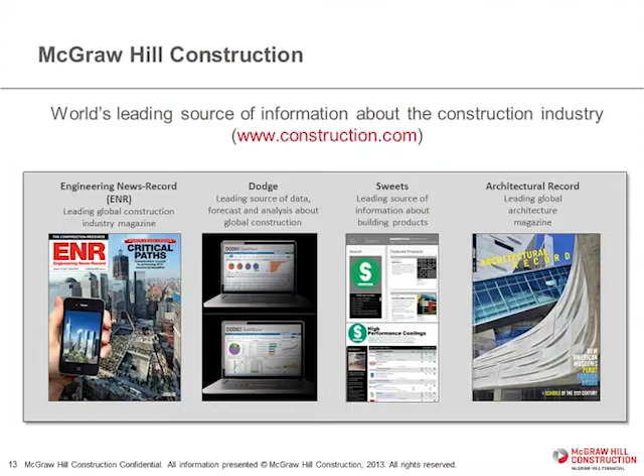At McGraw Hill, the construction business unit is part of 6 business units of McGraw Hill Financial overall. Hopefully you are familiar with a lot of our brands, Engineering News Record, Dodge, Sweets, and Architectural Record. Part of what I am closely involved with is the research. If you go to this website, analyticstore.construction.com, you'll see there's probably about 60 of these now, smart market reports that we've been doing for almost 10 years on various topics. I've been involved in a lot of these that you see here around technology types of topics.

So what we're going to do today is I'll give you some highlights of 4 of the most recent reports, all around technology in one way or another. Then I'll share with you a couple of what we're seeing as the most interesting emerging trends to keep an eye on, and some of the research we currently have underway. Again, these reports are free, sponsored by industry companies and organizations, and they're all at analyticstore.construction.com. Help yourself to them.

So firstly, let me show you the most recent one. It's only been out a matter of weeks now, and it's looking at how construction companies specifically are using BIM in 10 major global markets. We're looking at their level of engagement with BIM, how much of their portfolio they're doing, what their skill level is, what their experience track record is. We're looking at their business benefits, because that's really our angle in studying BIM around the world -- what's the business benefit and what's the return on investment, and where people are going to be making investments.

We also look into the frequency and the value of various business BIM activities, either pre-construction, construction, or post-construction. We have some country profiles for each of the 10 countries, and then there's a series of case studies, interviews, and feature articles on important trends, as there are in all these smart market reports. So I can't really present them in depth, but I'll give you sort of a drive-by view, and you can download it on your own and look more deeply at the information.

Overall, we've been tracking the business benefits and the ROI of BIM since 2007, and contractors have now actually exceeded architects in adoption in North America, and have always exceeded design professionals in terms of their ROI. At this point, we're finding that 3/4 of the contractors globally are reporting they're getting a positive ROI, and in some cases they're at 97% of users reporting a positive ROI. This compares to that last study we did in North America, where only 37% of engineers and only 2/3 of architects could say they were getting a positive ROI.

So the trend is really shifting towards contractors now in a leadership position in BIM, pretty much all over the world. The overall implementation of contractors is going to increase by 50% in the next 2 years. And you're seeing incredible planned growth over the next couple of years in places like Brazil, where they're going to triple the amount of people who are implementing at a high level. And Australia, New Zealand, Korea, and the UK, with their government mandate now, is going to double the number of contractors working at a very high level of implementation.

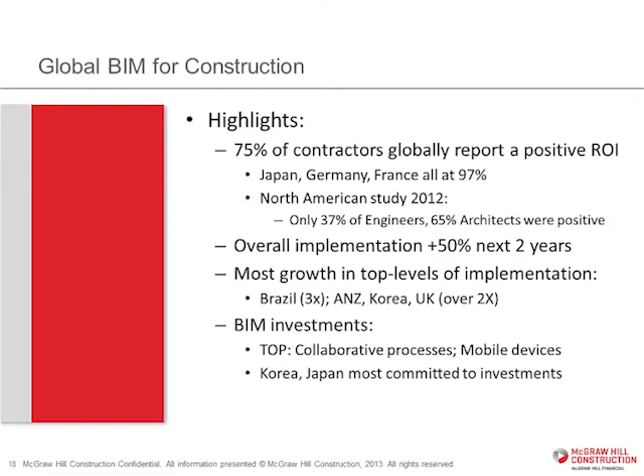And then you'll see some of the investments that people are making, and those who are most committed. Actually, the Koreans and the Japanese seem to be most committed in terms of making investments. So just some of the highlights of the information you'll see when you go through the report. You'll see what sorts of projects people are using BIM on, both building types and non-building types.

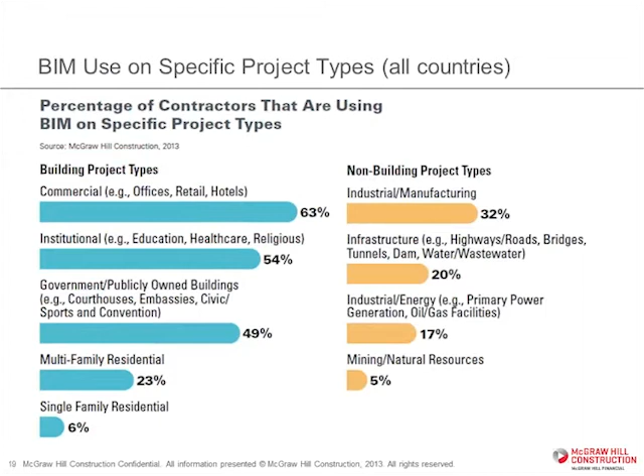And you'll see that broken out by country and with a little bit more specificity in terms of the types. You'll see how long contractors have been using BIM in various regions and their level of expertise.

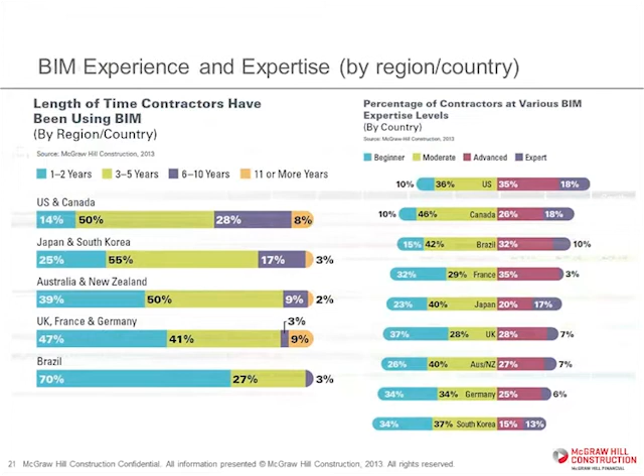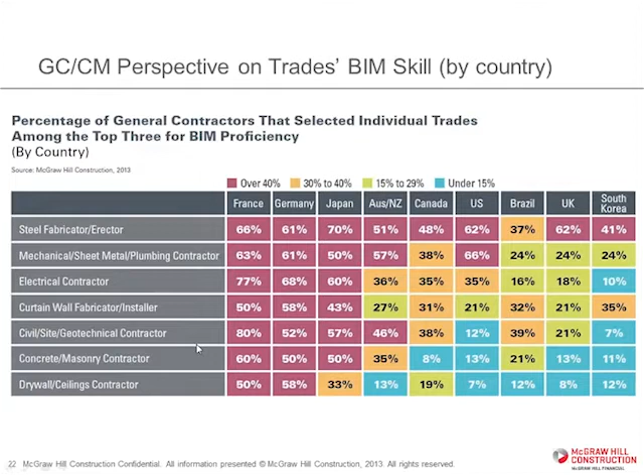And we take this expertise and this experience, and we also ask GCs to tell us what they think about the state of trade contractors by skill in their various countries. You'll see the steel guys and the MEP guys are pretty much the leaders, with drywall, concrete, masonry, and civil sort of catching up down here in the lower right.

We also look at implementation, which is, all right, you're using BIM, you've adopted it, but what percentage of your portfolio involves BIM now? So we have 4 categories. That low is really, they're kind of in the shallow end of the pool, only 15% of the projects, all the way up to a very high level where more than 60% of your projects involve BIM.

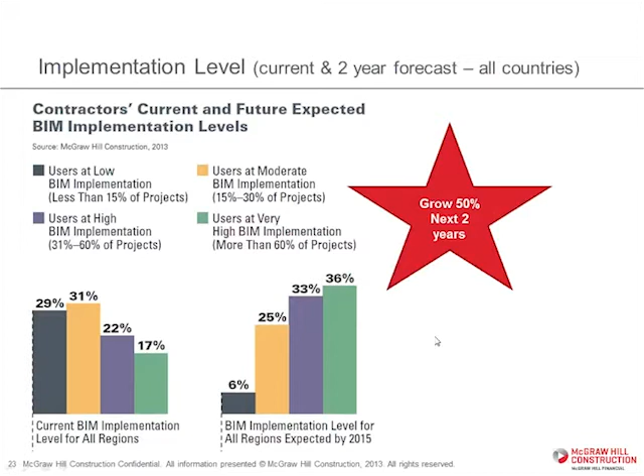And so these 2 graphs you see here, on the left is currently, and on the right is a projection for 2 years from now. And this is where we see this 50% growth in the amount of BIM that contractors say they'll be doing 2 years from now. So this is growing incredibly rapidly all over the world. You'll see a breakdown by country, and you see places like Brazil here is going to triple the number of people operating at that high or very high implementation level.

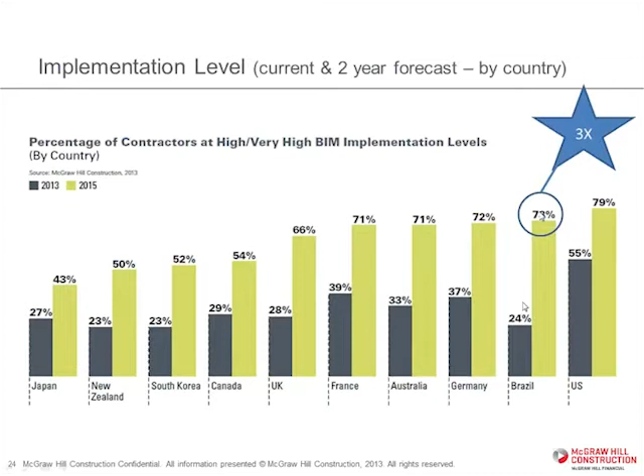And so we take those 3 things, the experience, the skill, and the implementation, and we developed a weighted scoring apparatus for that, which we call the BIM engagement level. We assign an index to every single one of the respondents, and then we break that down across all the regions. Overall, there's 11% that we would consider to be at this very high engagement level. They've got a high skill level, high experience level, and they're implementing at that highest level of implementation. So we expect that's going to grow interestingly over time as we continue to track this. So right now, we just have 11% of the BIM user contractors around the world that we would consider to be in that top group.

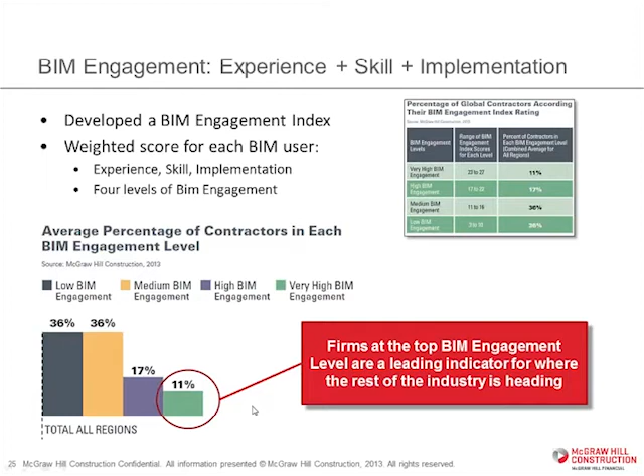And you'll see how that breaks out by country. The U.S. probably has the highest number at that very high level, but Canada also, Australia, New Zealand, South Korea, the U.K. all have folks operating at that very high level. And you'll see a place like Brazil still has over half their users at that low engagement level, but as we all saw earlier, they're planning to triple their high engagement folks very soon. So that's a really fast-growing BIM market down there. And the U.K. as well, because of the government mandate there.

And we break it out by the size of companies. So you can see with folks at the very high BIM engagement level, it's mostly the bigger companies, versus at the low engagement level, it's mostly these smaller companies.

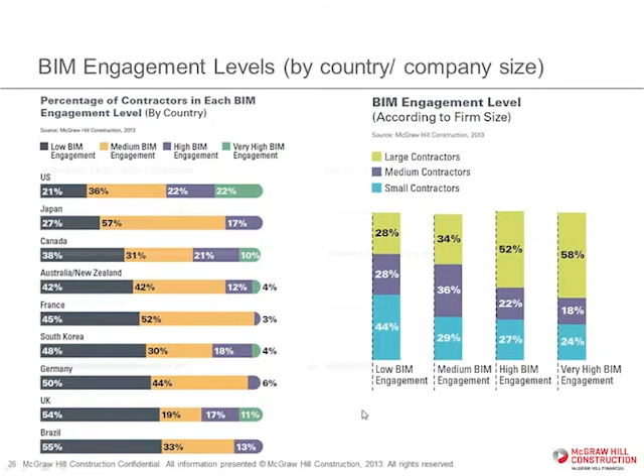So as I said before, we've spent a lot of time tracking benefits, and we've been doing this now for 7 years. You can see here across all those countries what people are citing, from the contractor's viewpoint, as being the top benefits of BIM for their company. I've put a little star by the ones we consider to be internal benefits—things that actually impact you as a business, versus making the project or the project process better. You can see where they fall, because those, at the end of the day, are the ones that really drive any kind of technology adoption. It has to actually be really good for the business that's using it.

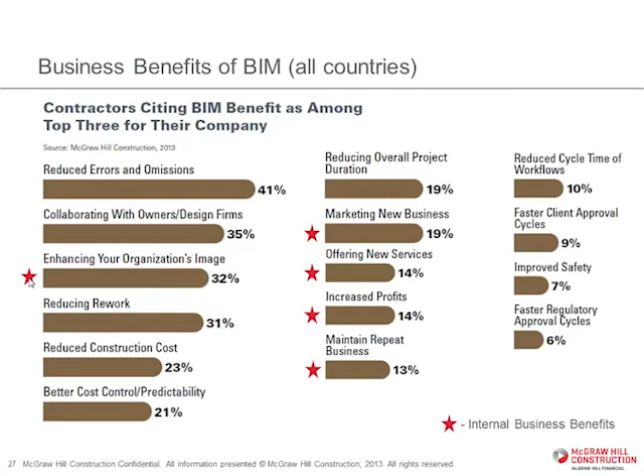In terms of ROI, we've also been tracking that since 2007. Across all those countries, it's kind of a bell curve, with what we call moderately positive ROI being the majority. But when you slice it by BIM engagement, you see half of those very high BIM engagement folks have what we call a very positive ROI, over 25%, versus those at low BIM engagement, where you still have a third that are either negative or break even. This is a natural flow, but it's interesting that as people improve and commit to further investment, further skill level, and further implementation, the ROI definitely improves.

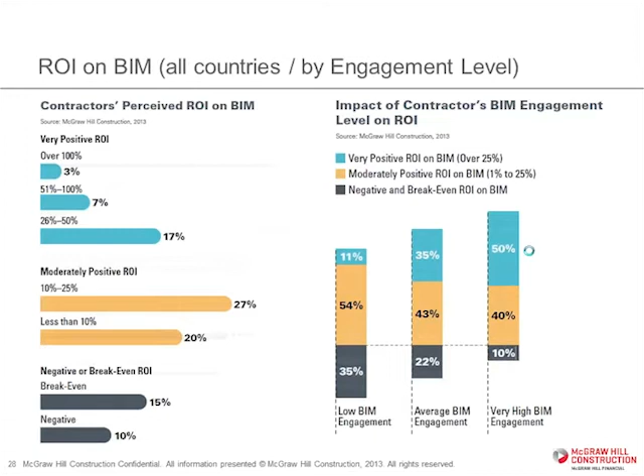We'll show it to you also by country. We do a 2-page spread on every single country, so you can look at those countries individually in the report.

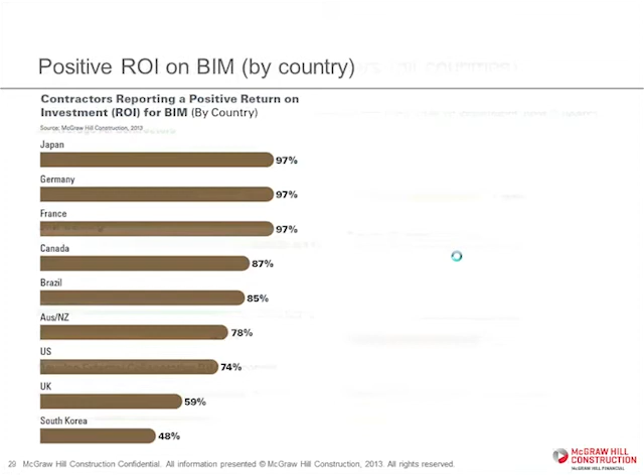That leads us to our quick look at the second report, which we did on information mobility. Again, this one's free at the analytics store. The purpose was to baseline where we are in terms of information mobility and assess any gaps that need to be addressed by the industry to make this more powerful.

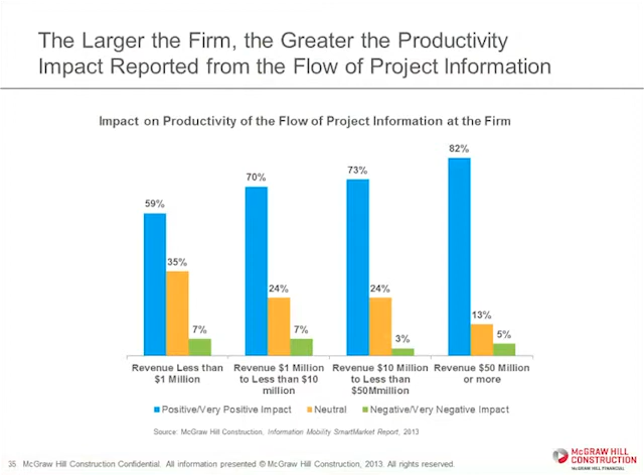We focused again here just on trade contractors and general contractors. In terms of benefits, you can see collaboration, better productivity, less reliance on prints and paper, and reduced risk. There's a study part about the impact on productivity of the flow of project information—the larger the firm, the greater the productivity impact that they found.

There's a fair amount talking about this progression we're making from basically 20th century types of technology—communications technology, authoring of information, and sharing of information—into where we're now going in the 21st century, and where the generals are and where the trades are.

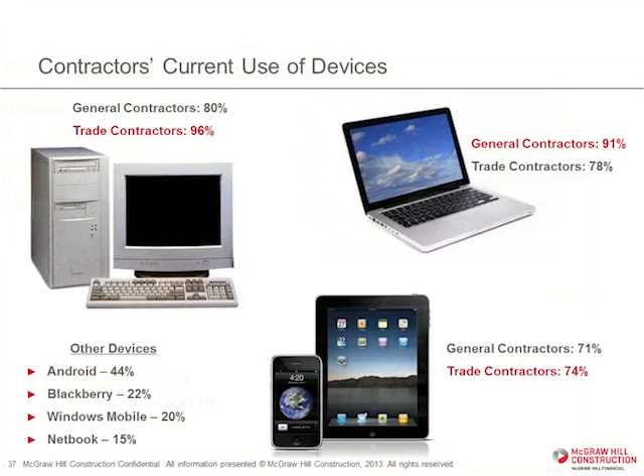In terms of BIM, this kind of information we've been tracking here in the United States since 2007, in terms of BIM adoption, hasn't really caught up quite so much when you look at what people are now doing on mobile. So that has to move out of the office and off the desktop and out into the mobile area. That's one of the gaps we identified that really still needs work.

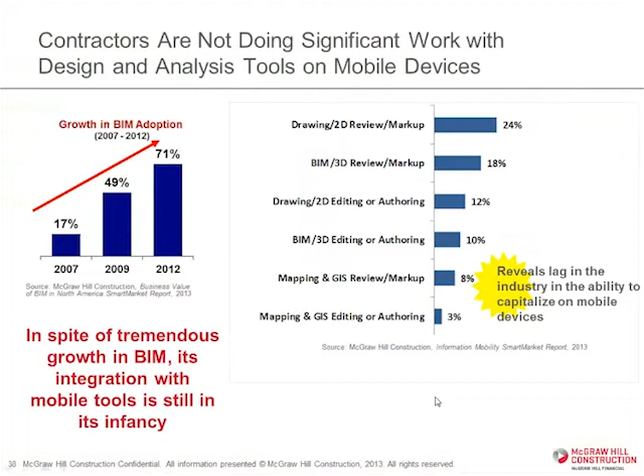Also in terms of documentation, mobile technology is going to lead us into probably new types of access and new types of documents. But mostly people are still working with sort of old-school documents in this new-school kind of communications tool. So that's another area that's going to grow—now that you have these mobile devices, what sort of document formats can you be bringing to people?

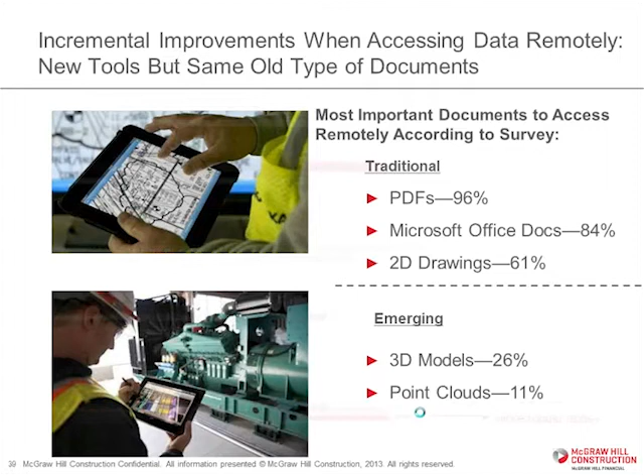We track that in terms of not only the types of documents, but cloud storage services. The gray line is now, and this red line is where people think they'll be doing it in 2 years. Everybody sees that they'll be doing far less in the way of these traditional documents being the main point-to-point exchange, and a whole lot more putting information up into the cloud and having people get it from there. So this is very clearly a trend that we're going to see in construction.

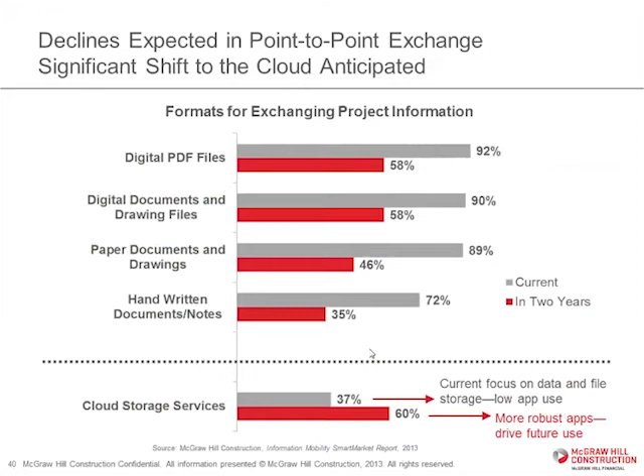In terms of lean design and construction, the third report I'll share a little bit with you today. This is free and you can download it from the site.

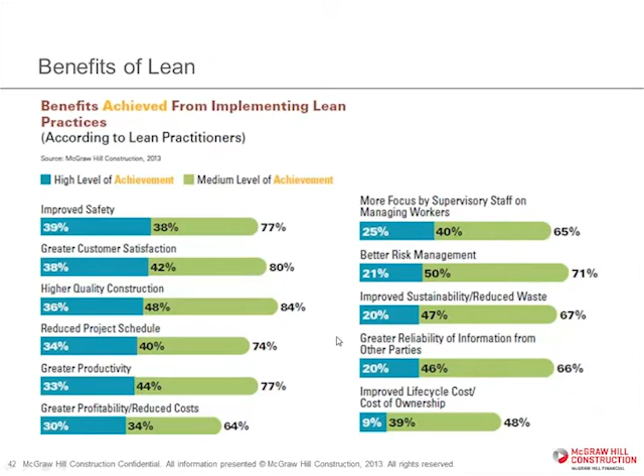We looked at the benefits achieved by those implementing lean, and it's really astounding. You'll see people at a high level of achievement and a medium level of achievement, and this is the percentage of those players actually getting these kinds of benefits. We go into detail about project profitability, impact on profit margins, and these green areas.

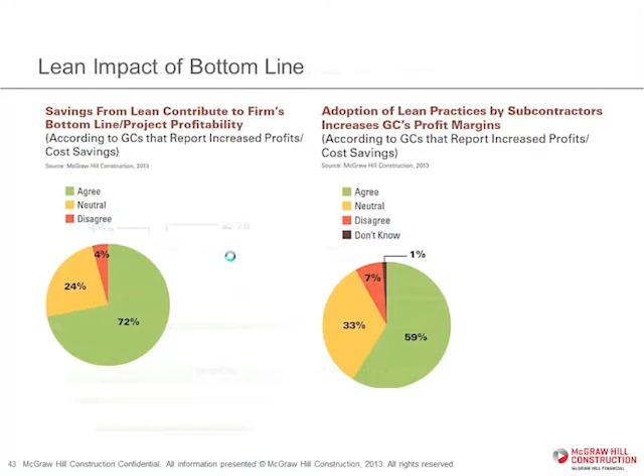Are where people agree they're actually getting a lift in those areas from moving into lean practices, specifically the impact on profit because of schedule improvements, impact on being more successful in bidding, and impact on competitiveness. These benefits are really compelling.

But unfortunately, when you look at the entire industry and ask them, are you familiar with it? Are you not familiar with it? Have you implemented it? It really isn't being taken up very aggressively. A little bit better in the West than other parts of the country, but still it's very much emerging, even though the benefits are very tangible and powerful.

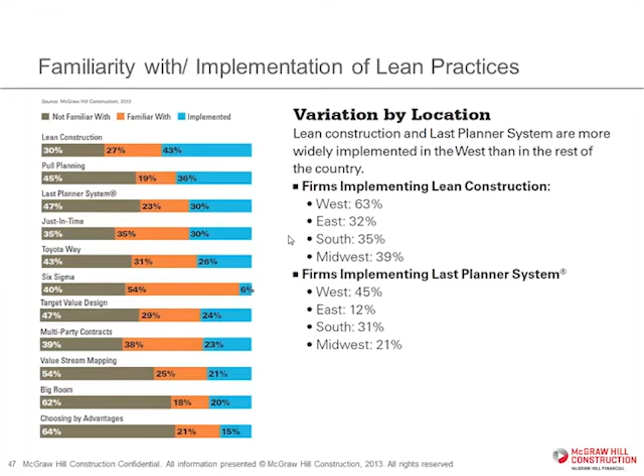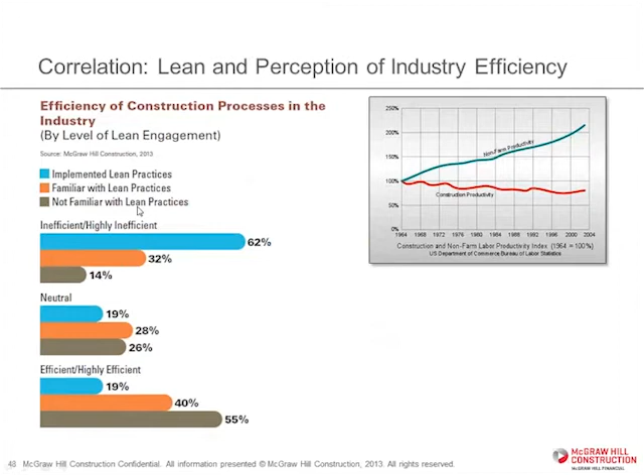You can see almost all of those are the folks who aren't even familiar, never even heard of lean. So I look at that as you've got almost half the industry out there in super denial about the facts of our industry.

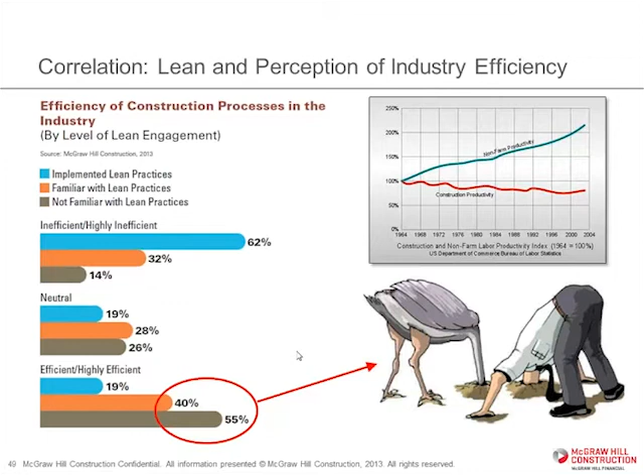So we're really trying to push much better awareness about lean practices and the benefits of them. As you wouldn't be surprised to see, we put a fair amount of time in this report into looking at why lean hasn't taken over as much as it should have, and it's really about a lack of knowledge, support across the team, it's too complex, employee resistance, lack of understanding.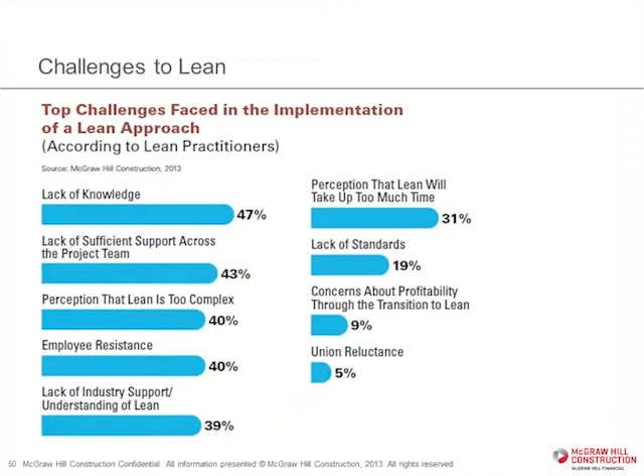So really an awful lot of this is educational, and that's part of why we do these reports, and we make them free, to try and get the information out.

Lastly, I'll show you a report we did about the growth of green design and green building trends all over the world. We did this in 62 markets, with almost 1,000 respondents across all the various types of players. We did specifically deep dives in Germany, Norway, the UK, Singapore, Australia, the UAE, South Africa, United States, and Brazil, but we do have data from all these other markets in this report.

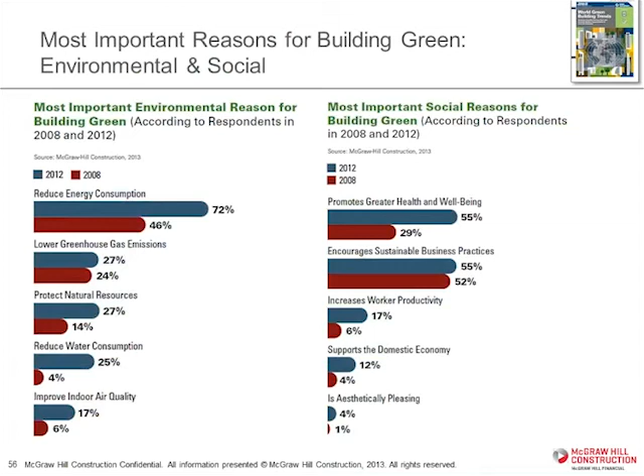We also track the most important reasons, the social reasons, the environmental reasons, and we look at what sectors are planning the green building activity over the next 3 years.

You'll see a deep dive into the various benefits that people are getting, and the difference between applying it to new construction versus renovation. Actually, the median payback on renovation projects is a little bit better than on new green building.

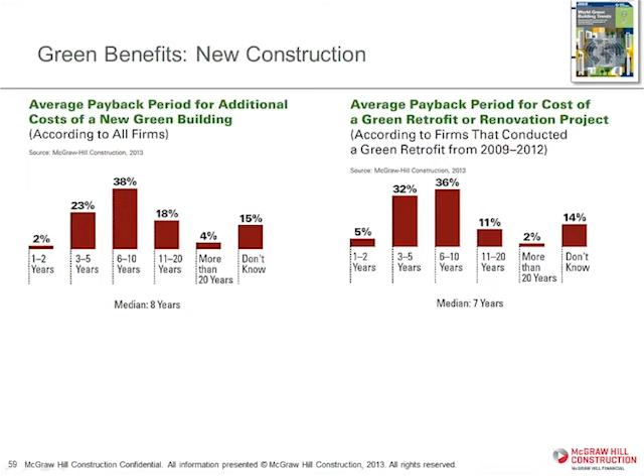And then the same thing in terms of business value. From an owner's viewpoint, is building green or renovating green going to increase my asset value? This is something we've been tracking for 3 or 4 years, because we see this as probably the biggest driver: owners realizing their asset value will increase. That's going to drive them to implement much more green practices on their new and renovation projects.

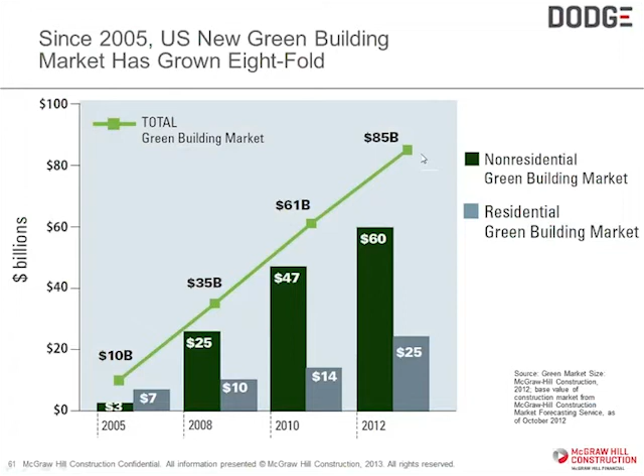Since 2005, we've been tracking projects in Dodge. When they come into our Dodge database, we have about 600,000 projects in North America at any one time that are currently in the design phase. One of the questions we ask is, are you going for LEED certification? And that, as you can see, has just really skyrocketed over the time we've been tracking it.

So if you look at where we believe the non-residential starts are going to be - this is a quick peek at our economic forecast, where we believe we're going to see extremely good growth over the next couple of years - what percentage of that is green is really exciting. And this is all non-residential.

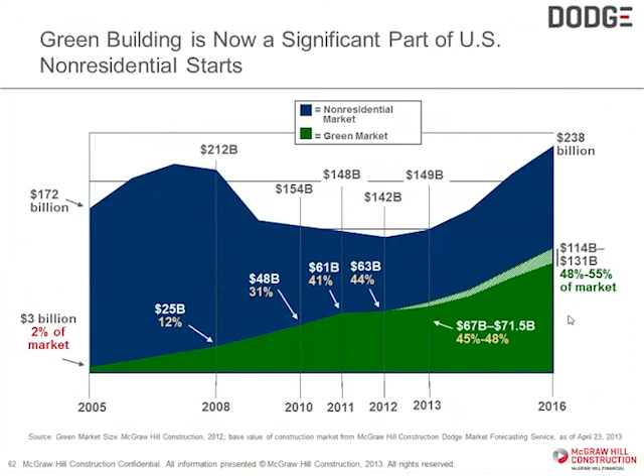We also show in the report the impact on revenues through this global financial crisis we've just been through. Those green projects versus the rest of the industry have actually carried people across the global financial crisis.

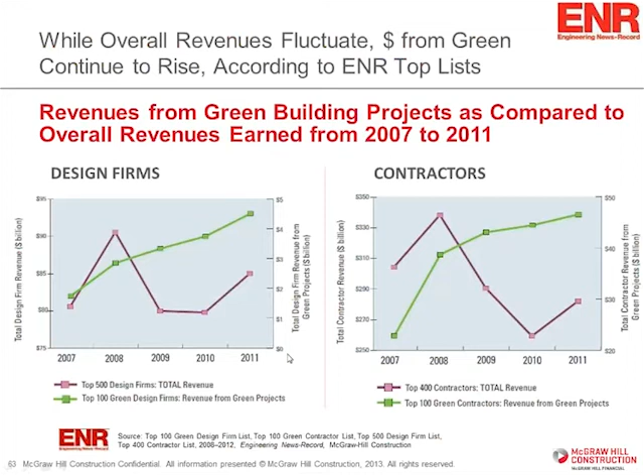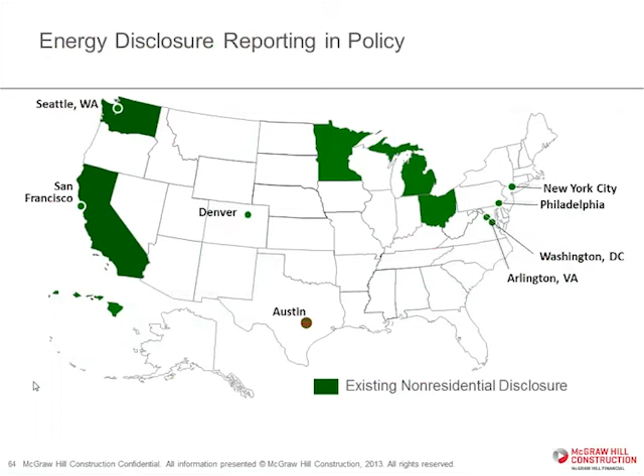Looking at what those drivers are, not only do owners have to understand it, but you can also do an awful lot with policy. The growth of energy disclosure reporting policy, where it's under consideration, and there's existing nonresidential policy as well - this trend will also really help drive green.

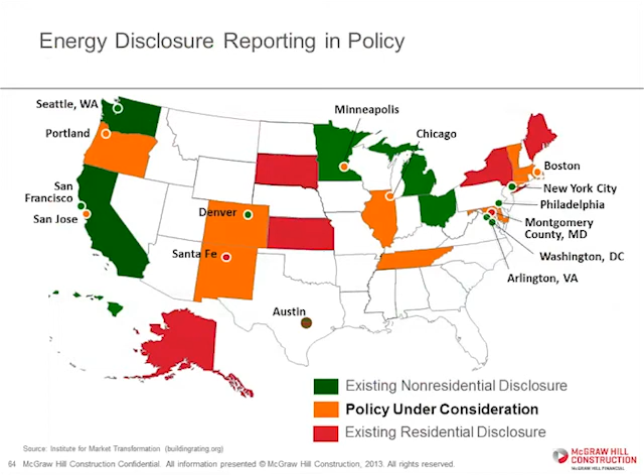So that was a look at those 4 reports. I encourage you to go to analyticsstore.construction.com, download any of those, and see the other 30 or 40 that are up there on various topics.

Let me share with you now some of our thoughts in terms of things we're seeing that we believe are going to be interesting trends affecting everybody. I'm just going to touch on a couple today. The first one's about visualization.

With BIM, we've been able to do incredible amounts of very powerful visualization, but it has largely been on a computer screen in an office somewhere. Not to downplay that - with 20 years in architecture, I know how important it is to engage a client or a contractor really viscerally and deeply visually in your design intent. But now the point is, how are we going to get that out to the field especially?

How are we going to take that model data and begin to integrate it into some other formats? How can we make it portable? How can we take the power of modeling and make it easy to bring with you? And how are we going to integrate it with some of the other technologies that are out there?

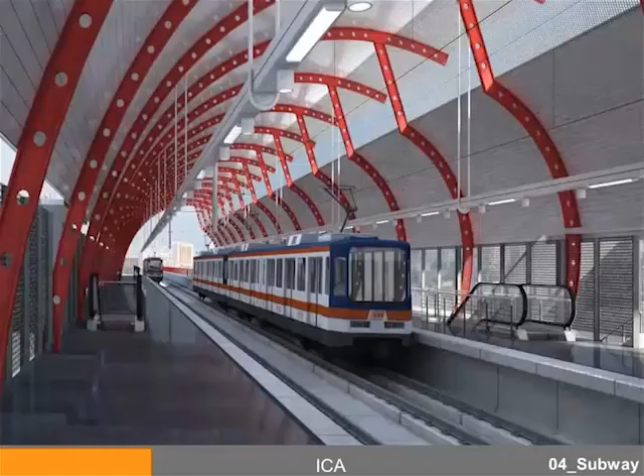Pretty powerful stuff. I don't know how many of you have seen natural light holography, but holography used to be pretty complicated in order to actually visualize it. But now you can take a model and print it onto a flat piece of plastic.

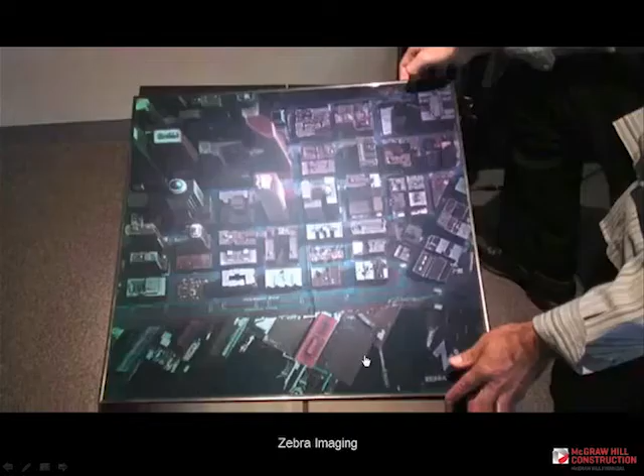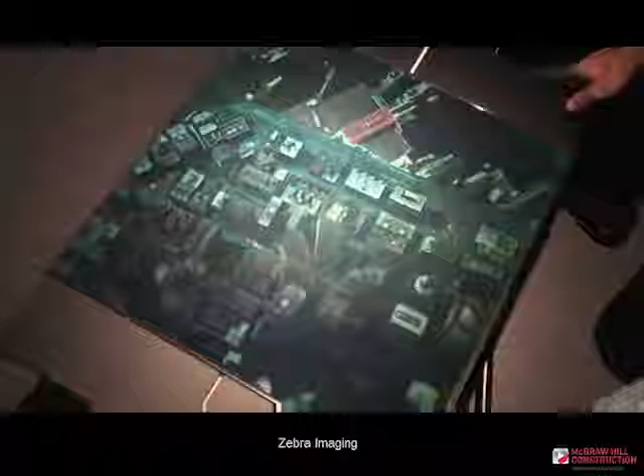And you could carry that on an airplane and go to a meeting, and you plop it down on a table, and nobody needs goggles or glasses or anything special. You hit it with a halogen light from above, and the model pops right up off that piece of plastic in pretty high detail, and you can see it right there in the room. But as you can see, this guy's turning it - it's just a flat piece of plastic.

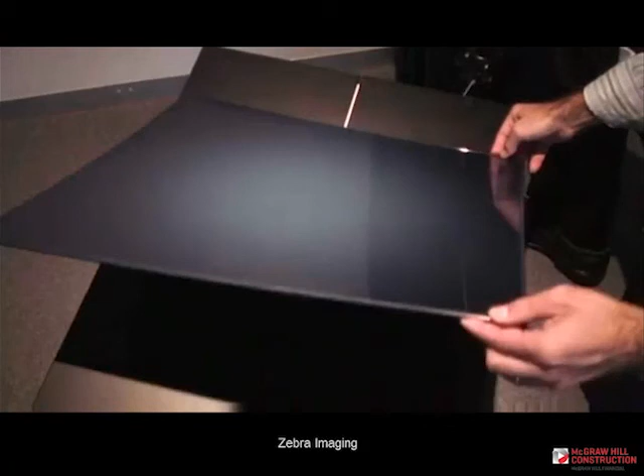So a very compelling way to make your model really portable and make it so that a number of people can engage with it without having to all crowd around a screen and look at it in a two-dimensional way in order to see three dimensions. Here you've actually got three dimensions that are portable. And as with anything, the cost will come down the more that people use it.

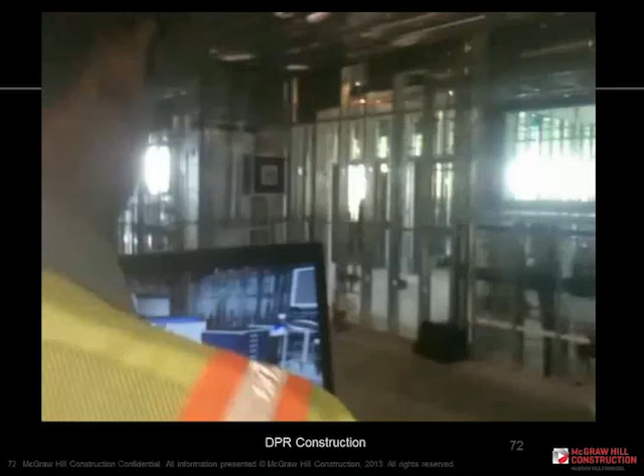Then there's lots of interesting stuff going on with augmented reality, integrating it with GPS. I like this example from DPR out in California. They do a lot of healthcare work, and one of the things that they'll do before they put the rock up, because they self-perform all their interior construction, so they've got it all studded up and they've got the mechanicals in there - they're actually walking around looking at, all right, what medical equipment is going to be in this space?

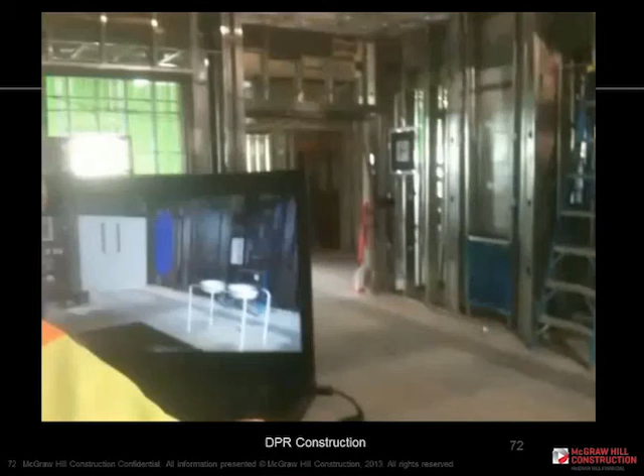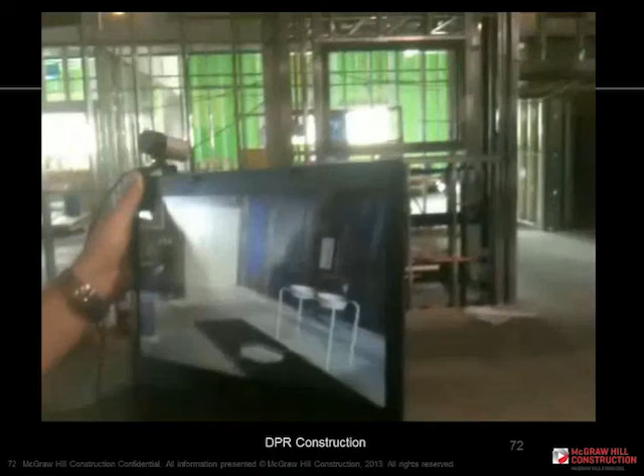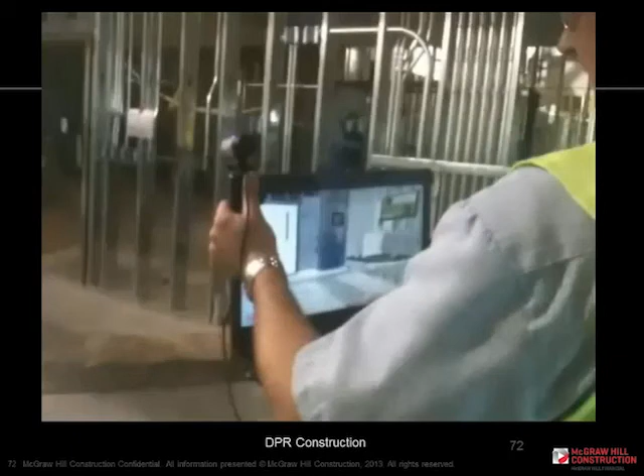And so that little camera connected to GPS actually locates where you are, and the model then displays to you exactly what's coming up from the model. So you're integrating model data with that live camera feed right on your camera, on the laptop, as you're walking in a space, and you actually see what's supposed to be here, so I can make sure the mechanicals are there and stubbed out correctly, before I rock the space. Very practical uses.

And then the same thing in terms of, what's the facilities manager going to be able to do coming in 3 years later to be able to see what's up above that ceiling - once you've captured that in a model, you can coordinate it through GPS to know exactly where the camera in your iPad or your laptop or whatever portable device is pointed, basically to show you what you're looking at with X-ray vision.

Pretty cool stuff. And then there's just going to be amazing hardware things that happen, to get into either amazingly immersive environments or, what we're seeing with Google Glasses, being able to really bring all kinds of information right into your existing world. So there's going to be very exciting things that continue to happen both on the hardware and software side, and it's going to be driven a lot by practical applications.

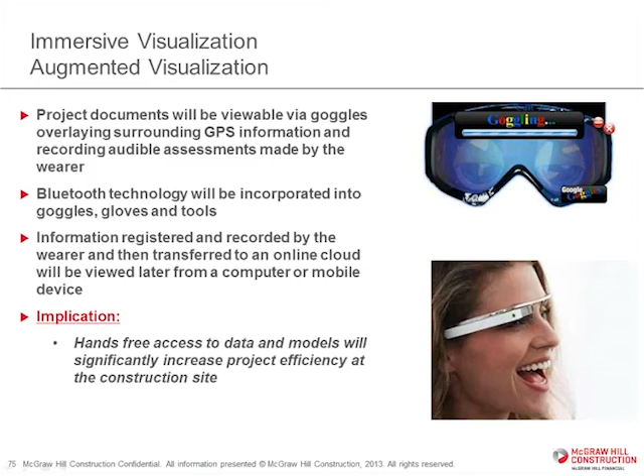And then lastly, I want to talk a little bit about a big trend that I think we're going to possibly be the most transformative trend in our industry over the next 20 years, which is what we call the industrialization of design and construction. You're beginning to see things like prefab.

We're very excited when we can prefab a corridor rack in a hospital and bring it to the site. That's great. But the next logical step is to be able to order that out of a catalog. There's no reason to design it from scratch, have it made by trade contractors one at a time, custom built. Yes, we're getting some efficiency by prefabbing it and not cutting up raw materials on a site, but the next logical place to go is, there's only a few versions of that you would really need to satisfy 80% of the needs out there.

Somebody's going to start making those. And somebody's going to start making combinations of slabs and structure. Somebody's going to start making combinations of systems and structure. And you'll be able to just specify out of a catalog and virtually assemble bigger and bigger chunks of things, and they'll just be brought to the site and assembled.

And that's pretty much the way that they've gone with shipbuilding, and they've gone with aerospace, and all the major manufacturing, capital asset manufacturing businesses have gone that way. So all we really have to do is follow in those footsteps, and you're beginning to see the early signs of it now. I'll share with you some of the things that we're seeing. There's a great example here from a mechanical contractor out in the Chicago area, called Hill.

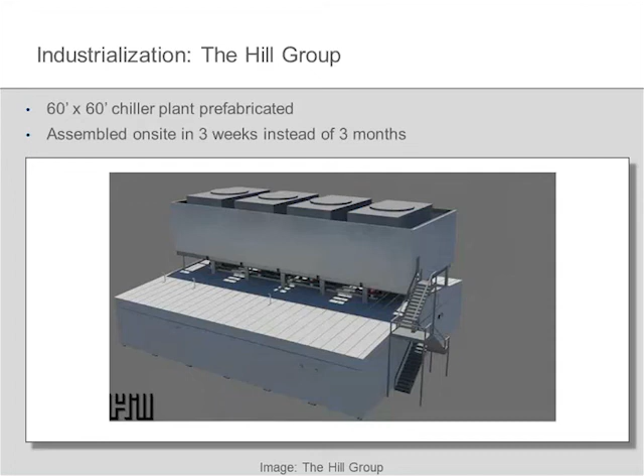They were faced with a real challenge: they had to build a 60 by 60 chiller plant. Normally they'd like to have access to the site for 3 months to build it on site, but due to the nature of this particular project, they were only going to have access to that part of the site for 3 weeks. So what they did is they built the entire thing off-site. This is that same chiller plant without the skin on it, in their shop - they tested it and knew that it worked before putting it together on site.

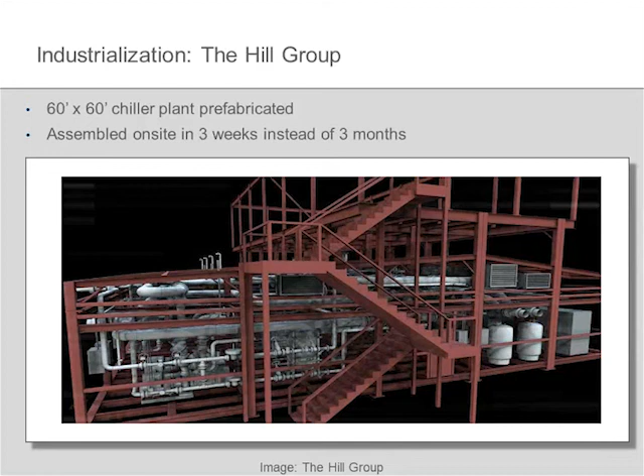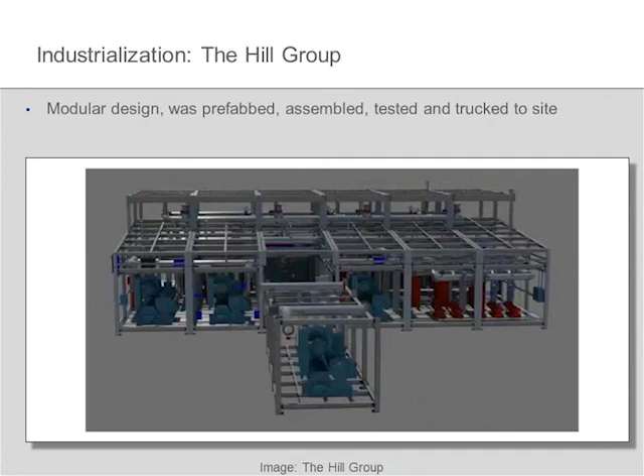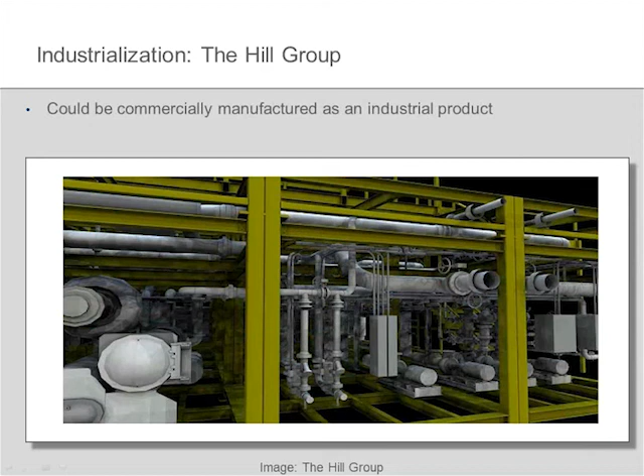They did it by breaking it down into modules. This modular design could easily be manufactured - it might be Hill, it might be Trane, who knows - this is a big business opportunity, but this is definitely the way we are going to go, where you'll be able to order these things. Look at the parting lines between these modules and the finished model here. You can see these things could really just be cranked out of a factory and be had in a matter of weeks.

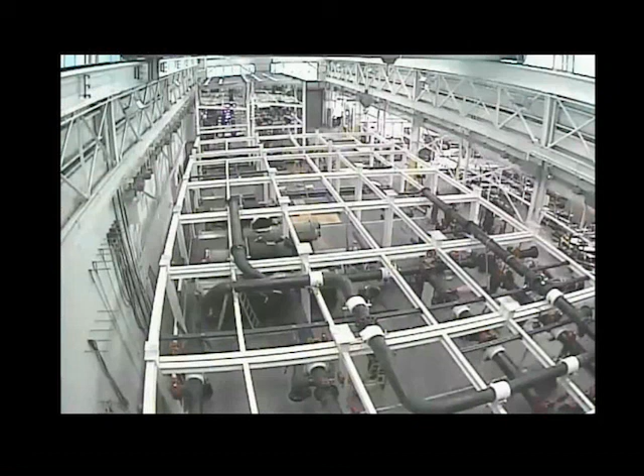So this is the view of them actually building this in their factory, in their shop, pressure testing it in advance. This is one of the most amazing prefab things I've ever seen - a 60 by 60 foot chiller plant completely built in a shop, operated and tested, then broken down into parts and moved out onto trucks and installed. They were able to get into the site and get it all up and operating in 3 weeks.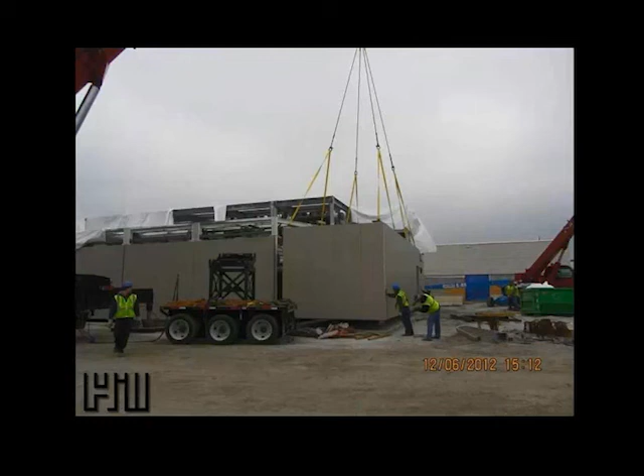I'll give you another example. In Mexico, there's a company called ICA, very well known for self-performing precast. Now they've gone into the correctional facilities market and actually built a factory. They have a series of modules that you can virtually design - you can see on the left, these things can be configured for endless numbers of very interesting designs. So you're not constrained in any way in terms of what your design is.

On the right here is one of the actual completed facilities, and here's a model, part of which you'll see in a video in a second. At this point, from this library of modular designs, they can produce 50 cells a day out of this factory. So they're pretty much completely reinventing the correctional facilities industry.

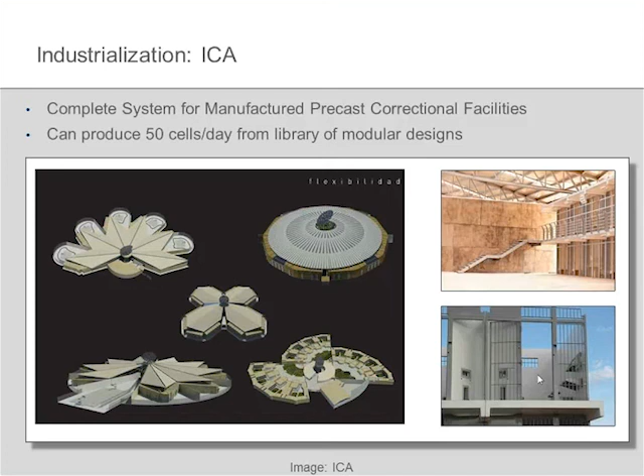Here you see you put down the precast frame, and then out of that library of modular elements, their factory can make whichever ones are needed, and they're just brought to the site and assembled. So they're taking about 30% out of the time of actually putting one of these things in place.

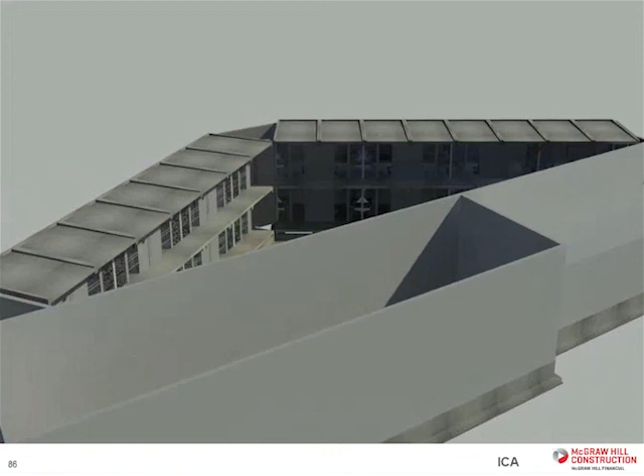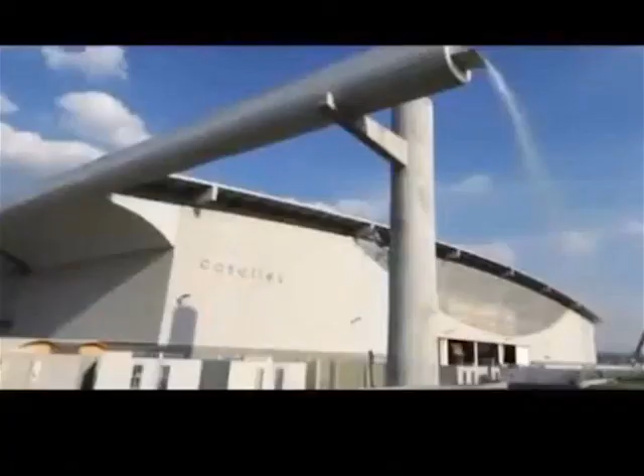They're getting a lot of success in the Mexican market, and they have a partner here in the United States that's going to bring them into the U.S. market. So this is going to fundamentally and dramatically change that - and this is their factory. They have a purpose-built factory with these computer-controlled molds where they do research into materials, textures, colors and fabrication technologies, and they can bang out 50 cells a day out of this thing. It's pretty incredible.

And they're also doing the same thing now with housing, which there is a great need for all over the world - to be able to do really good quality housing and take advantage of what I call mass customization, where you have computer configurable molds that can turn out 1 or 50 of something. It's indifferent to them - they just pour the concrete in, it's molded up, and they go. So again, this is going to fundamentally change a lot of things.

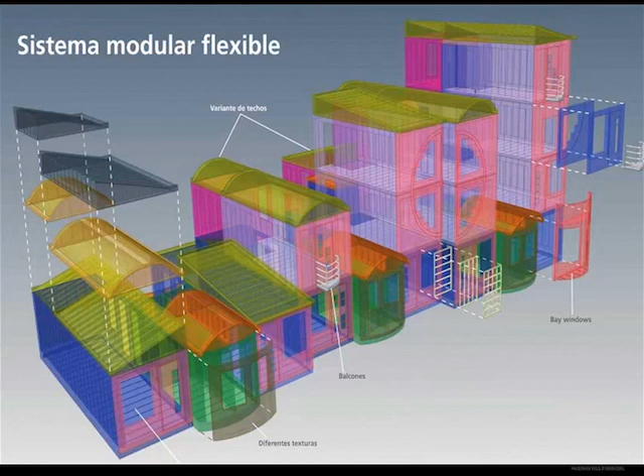And then lastly, I want to point you to a company out in the Bay Area called Aditazz. A friend of mine was with Anshen and Allen, and he left there - he was a great healthcare designer, and he hooked up with some folks from the silicon chip industry.

In the silicon chip industry, they've already advanced pretty far in terms of taking one basic design and being able to configure it for all kinds of different uses in manufacturing. So essentially, they're taking that small-scale idea and putting it to the full scale of being able to do hospitals off of a pre-engineered kit of parts.

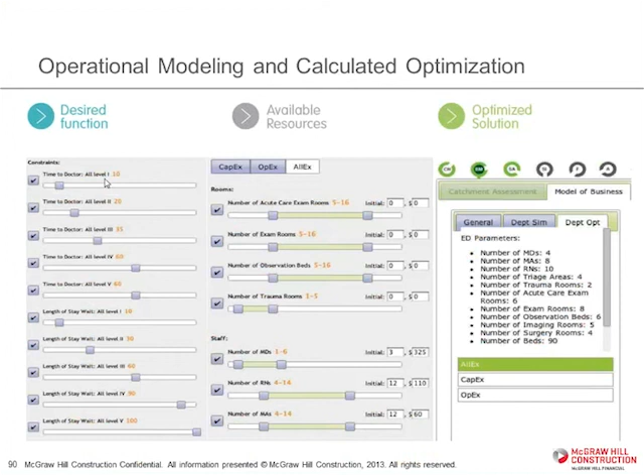This is an example of a project they did for Kaiser Permanente, which won an award last year. The idea is they start with operational modeling, and everything is calculated for operational optimization. In this case, if your goal is that at a clinic, time to doctor is 10 minutes, what does that mean in terms of all the design layout? So instead of starting with the design, they start with operational criteria, and that is calculated to drive the design solution.

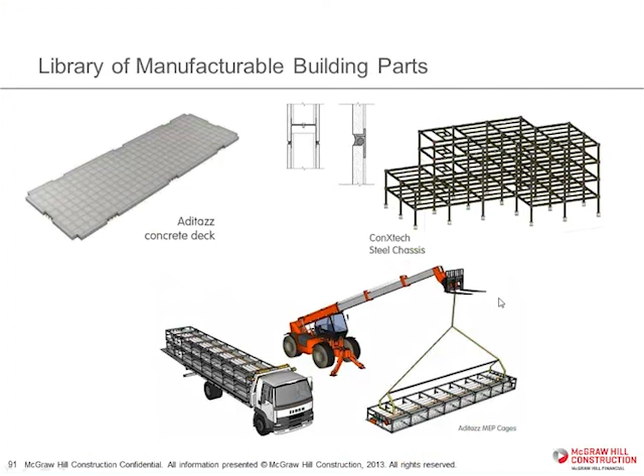They have the steel chassis they're working with from ConXtech, another Bay Area company, which has these fast-connect systems able to withstand a certain level of seismic activity. They can basically put an entire healthcare facility together out of this kit of parts, including all the interior partitions with mechanicals in the in-wall systems, just bringing them to the site and assembling.

So they're really shifting from lots of raw materials at the site and things being constructed, or even customizing a design and having it prefabbed, into constructing entire facilities out of this pre-engineered kit of parts. The beautiful thing about a slab made in a factory, as opposed to the 1-inch tolerance across 10 feet you tend to get with field-built slabs, which makes it really difficult to use any kind of prefabbed wall systems on top of it, is that everything is done with factory tolerances when it's brought to the site.

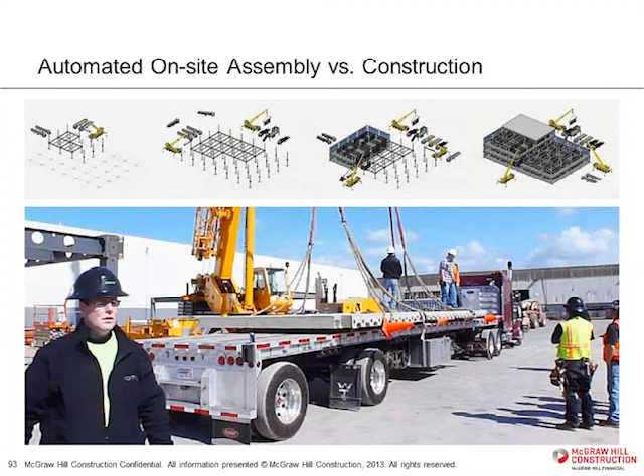This is that design that won the award with Kaiser, and what you see here is an example of some of those elements all put together in the space. So you're doing high quality, much faster, and it's less expensive than traditional healthcare facilities. These are three examples, I think, that point the way towards where this whole industry is going, and modeling is really at the bottom of all of these things. Because we're dealing with things at the digital level, now we're able to actually implement at the digital level, much like happens in those other major capital asset industries I talked about.

Right now we're also involved at McGraw Hill in looking at the whole issue of uncertainty in design and construction. We've got a major study going on right now funded by four organizations and two companies, trying to unravel what brings uncertainty into our process and how that can be addressed.

We're now also beginning a process of looking at what is the value of BIM from the owner's perspective, not only in design and construction, but what's happening with the long-term use of that modeled asset in facilities management, operations, and maintenance.

We have a third initiative we're calling High Performance Construction, and we're doing our first event on that in March. We'll be doing an event in the fall on the East Coast, and I hope to get most of you guys to come to that. We've all seen high-performing buildings, but what about that process of getting that building put together? What is it about that we could call high performance, what are the benchmarks, what are the best practices, how can we measure that, how can we begin to score that, and how can we really bring some science to that process of high-performance construction?

We're also looking, interestingly, at the impact on students and teachers in terms of their health in educational facilities, and how design impacts that. And then we're also looking at the impact of analysis and simulation on project outcomes.